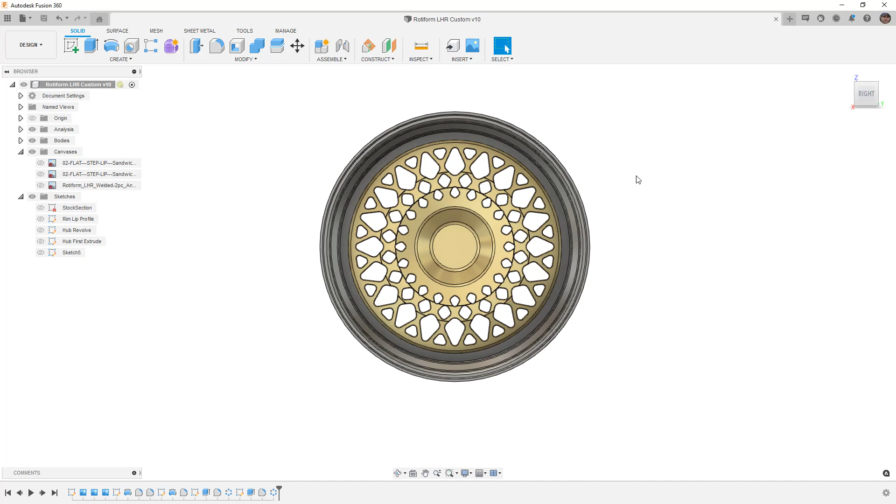Now remember when we first looked at the Rotiform rims, there were a lot of different configuration options. We can have a center cap which hides all the lugs, and those can be used for those sort of aero covers. We can also configure a lot of different things about the way this looks.

We are going to model it as it is inside of the image that we're using. We're going to have these little details, and we're going to take care of the details for the lugs. We want to make sure that we replicate these, and that's partially because these are challenging, and I want to make sure that we at least explore them.

So the first thing I want to notice is that this feature appears to contain the underlying shape that it's cutting away. So that flat face or that conical face is carried into this. We can see the reflections and the way that it looks. This tells me it's an offset cut. I want to explore how we can do that in Fusion 360.

Then we're going to move on to these little dimples and also the lugs here.

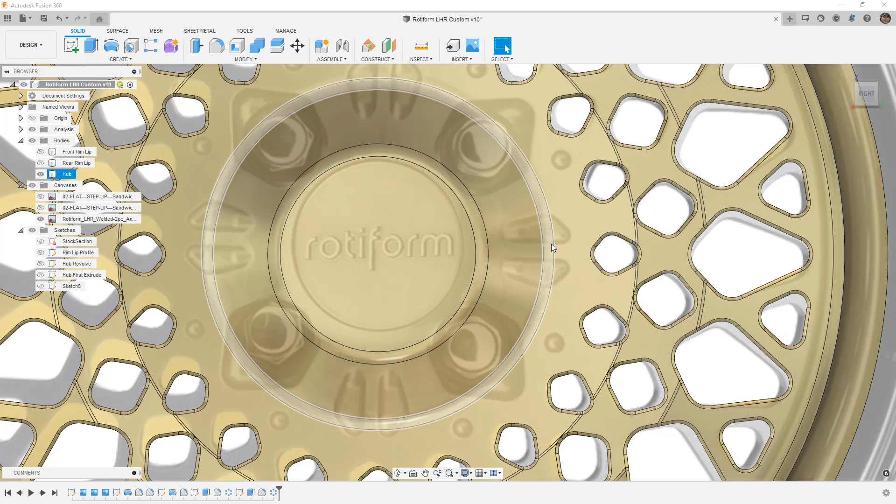So let's bring back our hub solid body. If you're following along, go ahead and continue to use your design. If you had any trouble, you can download this design from the description in the video. We want to work horizontally again, and we're going to just carry on because that's how we modeled all this other stuff. We want to try to make this design, which will then be mirrored and patterned.

So let's start a new sketch. Remember, we can hold down the left mouse button to select the YZ plane, as long as it's under our cursor. Again, I'm going to start with a line, a horizontal construction line, and I'm just going to bring it out here, hit escape, and then turn that to construction. So this is going to give me sort of a reference point.

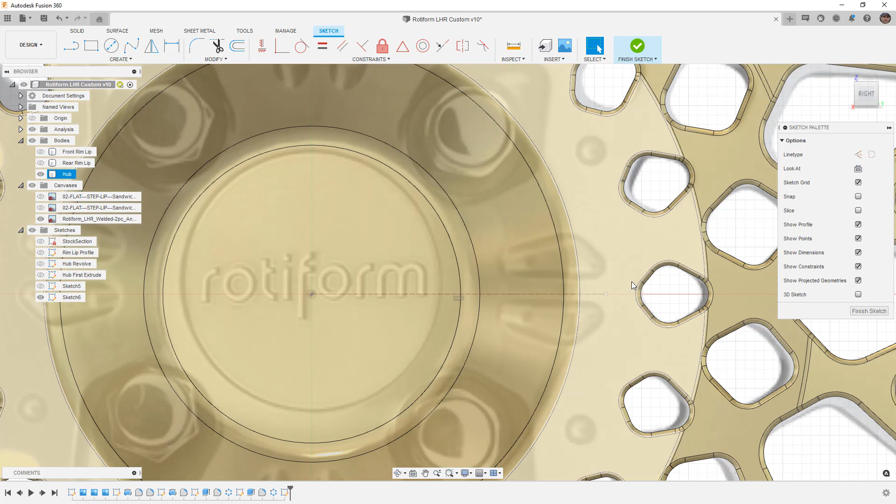Now remember, we are going to just model one side of this, and we need to be aware of where these are falling in the design. So I'm going to use P on the keyboard and project just this point. Then I'm going to use P again and project another point. If I'm looking at this straight line, it looks like it intersects here, and if I carry this line out, it almost looks to me as if it's going to intersect here. So visually, those are two points that I want to use.

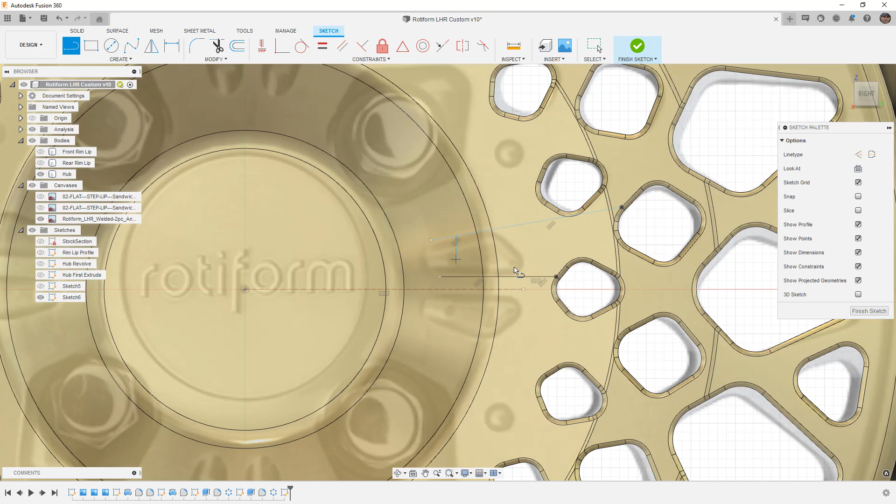Again, using a line, I'm going to carry a line down to here, and then carry it over, say okay. I'm going to carry a line from here, carry it over and say okay. These lines are going to be construction at this point, and these ones will actually be used for the design.

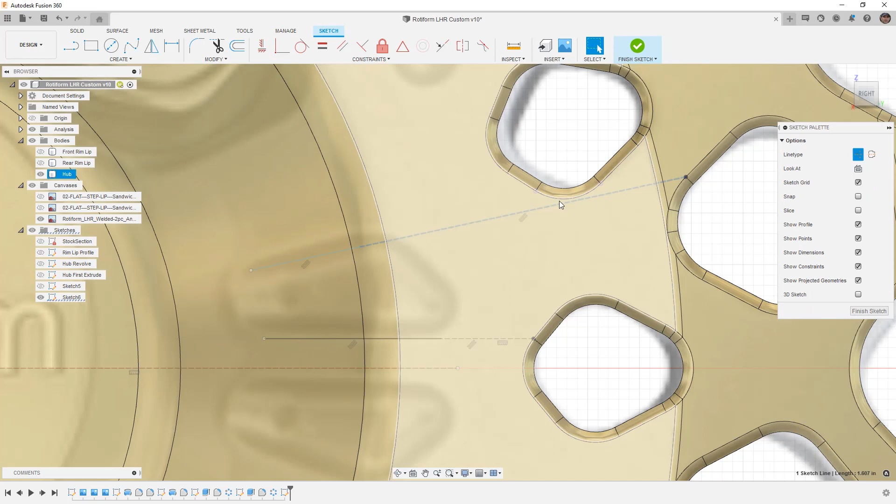Now notice that it's not fixing an angle here, and that's intentional because we're only projecting a point. If we were going to carry it from some other detail, we would need another point of reference. For example, if we use P on the keyboard and turn this into construction, we can say that these two are tangent potentially, or that they intersect. In this case, I'm not going to worry about it, but just note that if we were trying to drive this off of something else, we would need some additional references.

I'm going to continue using lines to drive the shape, and that's simply because I think the rest of these are lines, and then this is a large arc back here.

So now we're going to go to create arc, 3-point arc. We'll go between these two, from here to here, and from here to here. I'm going to try to add tangency to everything, make sure that this arc is tangent, and then this last one here. That looks pretty good, I'm pretty happy with that. I don't really care so much about the dimensions, but let's go ahead and add a few.

I'm just going to select things and add whatever dimension is coming up. And just to help me fully define this, I'm going to right click and make that an aligned dimension. I'm going to give this arc a value. And we also need to figure out some positions, right? So this in relation to the origin, for example, and that'll fully define us.

So the next thing that I want to do is hide this LHR wheel. I'm going to try two different things. The first thing I want to try is extrude. Now the way that extrude works is going to be a little bit tricky, but note that under start, we can offset and we can also start from an object.

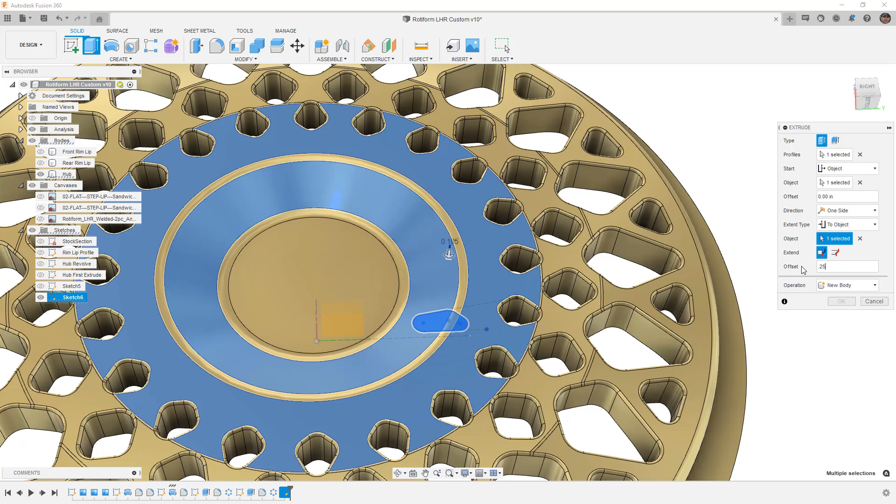Now, there is a difference between starting from an object and ending at an object. When I do this distance to object, what I want to do is select this face right here, and I'm going to give it an offset value. I'm going to say 0.25. Let's try minus 0.25. And you can see that this isn't working.

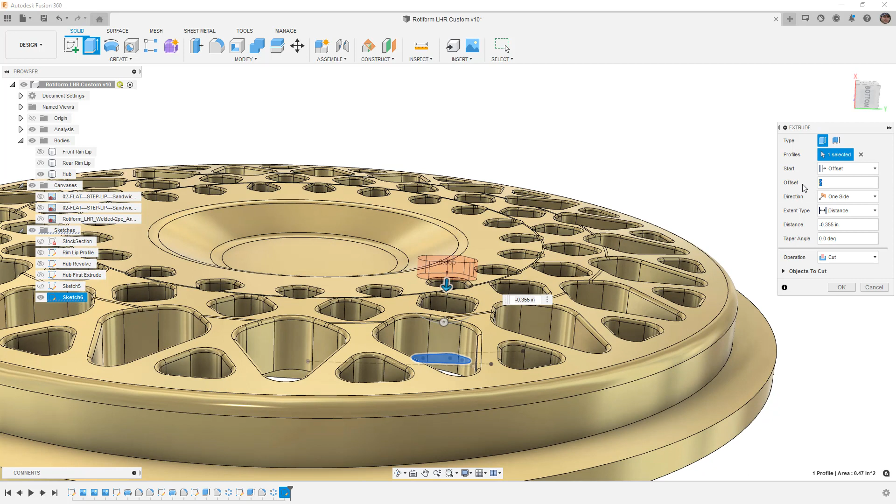So let's reset this. Instead of object, let's do offset. I'm going to say offset, let's say minus 2 inches and see where that puts us. So it's going down. So let's say positive 2 inches. That puts us in the middle of the rim. So I'm going to say 3 inches. That puts us above the rim.

Okay, then next I'm going to say to object. I'm going to select this entire object as the body. And then you can see it's got this minus 0.25. So now what we're doing is we're cutting into it. We're offsetting from the shape of the rim, and that's giving us the final cut that we're looking for.

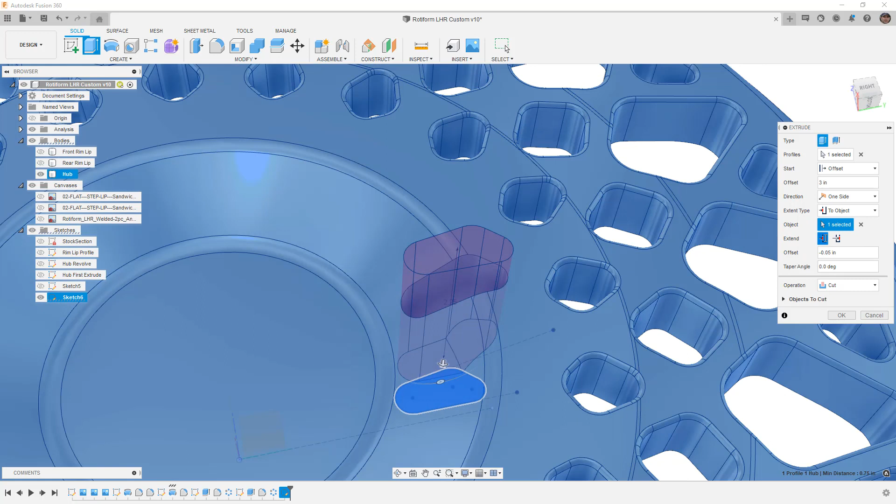When I say minus 0.125, you can see that offset for some reason goes quite a bit deeper. I don't really know why that is. It shouldn't really be going that far, but let's try a smaller value. The reason this can get a little tricky is because sometimes it wants to go through the entire body, so you have to be careful about how much we're taking away. That looks pretty good. I might increase it a little bit. Let's maybe take it to 0.1.

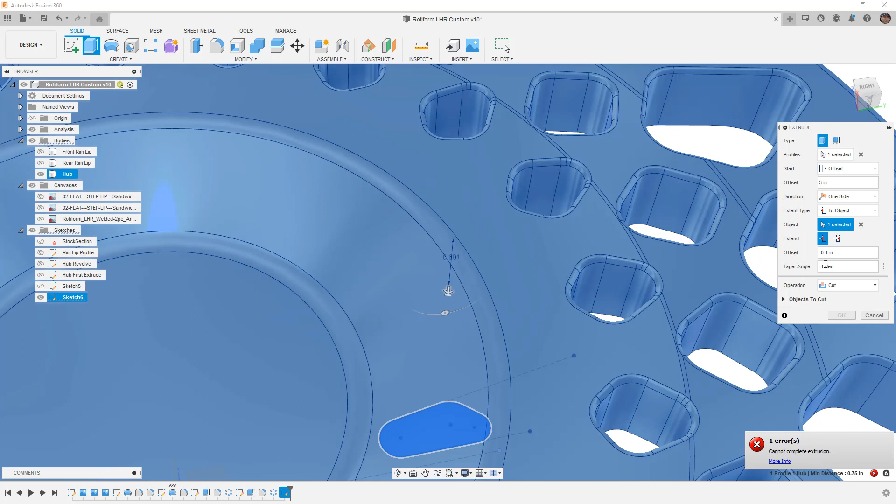And if we want, we can try to add a taper angle, let's say 5 degrees. You can see that completely does away with it. 1 degree doesn't work. Let's try minus 1. You can see that it's not really liking a taper angle, so let's leave it at 0.

Let's say okay. So now that we've cut that out, let's try to add a fillet to this bottom edge. Now remember, we cut down 0.1. If we go all the way to 0.1, you can see that it fails. If we try half of that, 0.05, we get that sort of rounded shape. I'm going to hold Control, or Command if you're on a Mac, and add it to the upper edge as well. So that gets us pretty close to the shape we're looking for. It's not perfect, but it does get us pretty close.

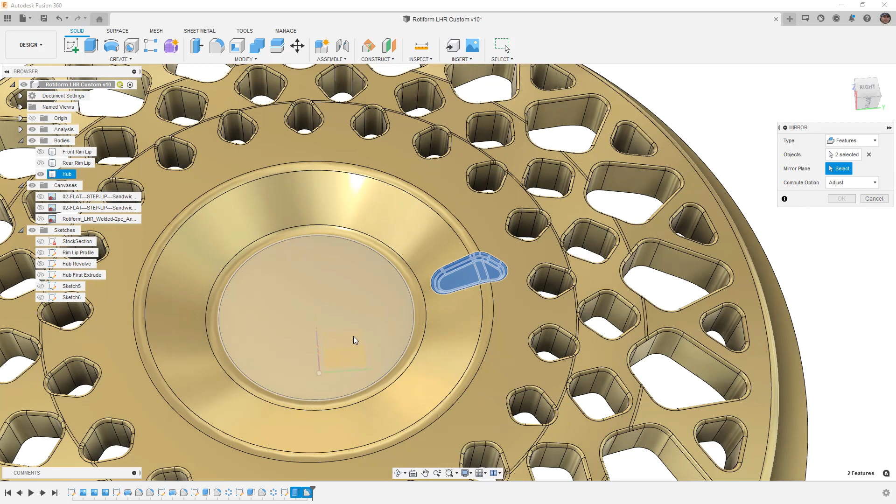So now that we have that, we're going to go to Create and Mirror. We want to select Features. We're going to try Features first. If Features doesn't ever work, you can always try to use Faces, it's usually a little bit more robust. And then for the mirror plane, I'm going to hold down the left mouse button over these planes, and I want to select my XY plane.

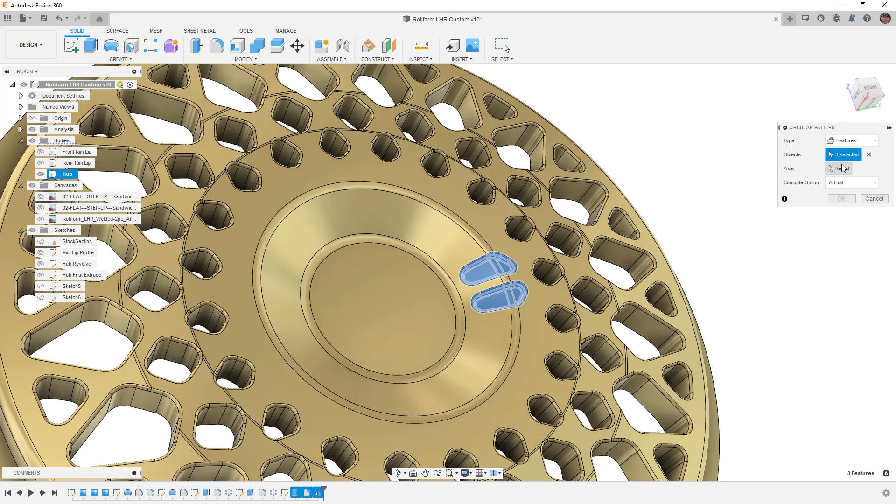So now that I have that on both sides, I can go to Create, Pattern, and Circular Pattern. I'm going to select Features, which will be the original extrude, the fillets, and the mirror. The axis of revolution, again, I'm going to select a cylindrical edge on my part, and this time it's only going to be 4. Now remember, on the picture, if we bring that back, we've only got 4 of those things, and again, this is going to be a 4-lug design, 4 lugs. We're going to say okay, allow it to adjust and see what it looks like.

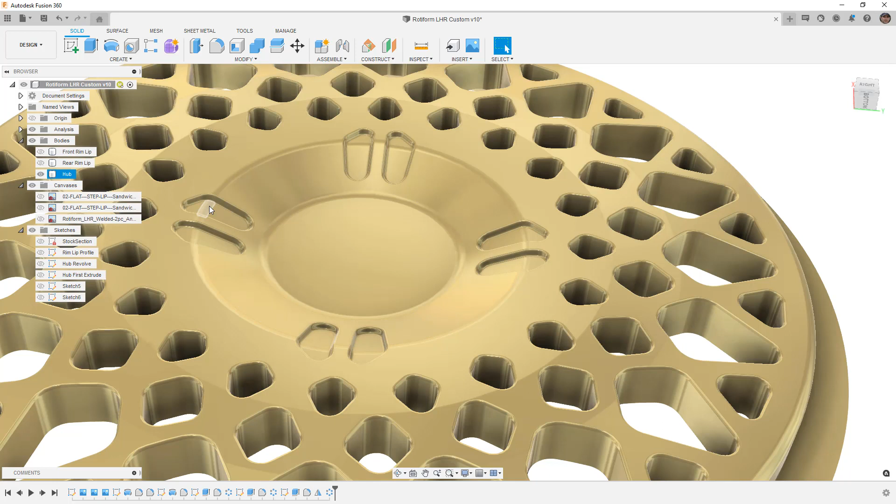So that looks pretty good. I'm pretty happy with those results. If we use Control or Command 4 to turn off the edges, that's what I would expect to see. You can see the shading and the shadowing, the lighting effects carrying on because we just recessed what was there. So that end result looks pretty good. There's a few more things that we have to add.

We have to add the dimples. We have to add the text in the center, which in reality is a separate center cap, but all I'm going to do, because this is really just for visual reference, is cut that away from what we have here.

Unfortunately, that is not a text that we're probably going to find. We're going to have to sketch that. We could also use a decal. I mean, it is possible for us to just apply a decal over it, so that might be a good option as well.

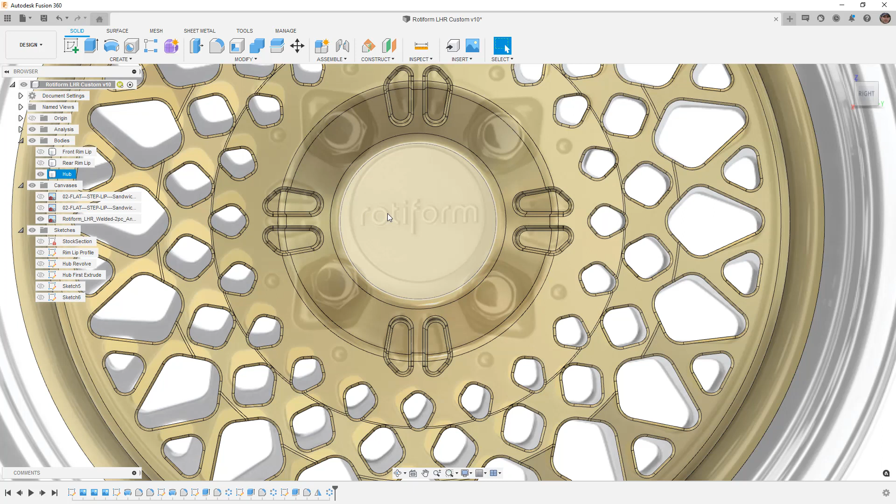But next, we're going to try to take care of the dimple, and we want to take care of the lugs themselves. When we're looking at this process, we have to think about the size of the lugs, and whether we're going to add the detail of the lugs being their own body or just part of this design. In this case, I'm going to draw the lugs separately, and I want to try to capture that detail. We don't really have all of the detail, but I want to start from the back side for the lugs.

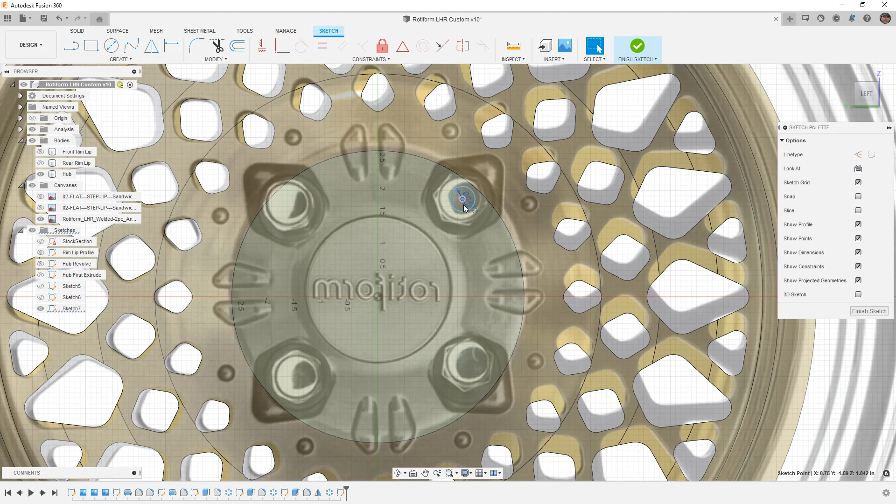So I'm going to create a sketch, bring back this, and start with a circle. In my design, it's a 12 millimeter lug that goes through here. Then we need to be mindful of the size of the pattern. So C on the keyboard for circle. I'm going to snap to the center of that, turn the circle into construction, and give it a diameter value.

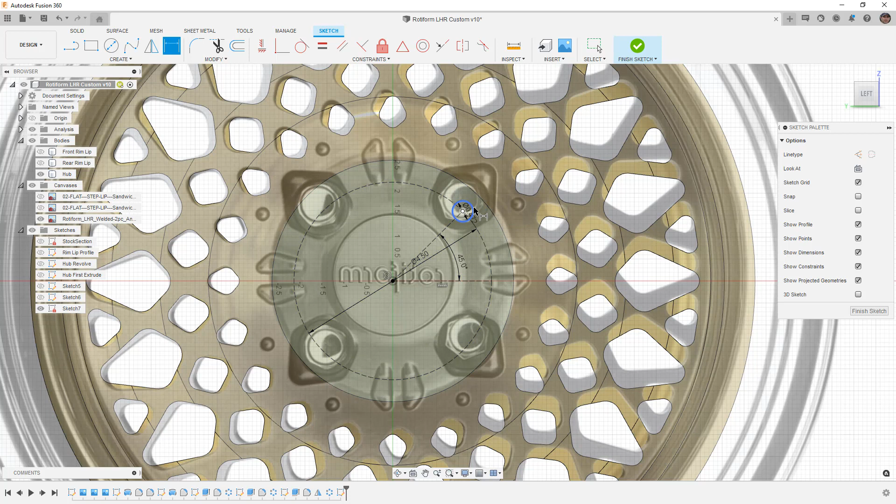Remember, mine was 4 by 114.3 millimeters, and that's going to give us the center of the lug, 114.3. Then we need to figure out this angle. So again, L on the keyboard. I'm going to make some reference lines, turn them into construction with X on the keyboard, and then dimension the angle between them. In my case, it's going to be 45 degrees. You can see it doesn't perfectly line up with the image that we have, which is why we want to do this part first.

So we're going to finish the sketch and extrude that. We're going to go all the way through, so the distance will be through all. Again, objects to cut, make sure it's just the hub, and we'll say OK. We could sketch all of that at once, but we're going to be patterning it, so I'm really only focused on one for right now. Now that we have an accurate location for the lug itself, we can get a better location of where the dimples are and the rest of these features.

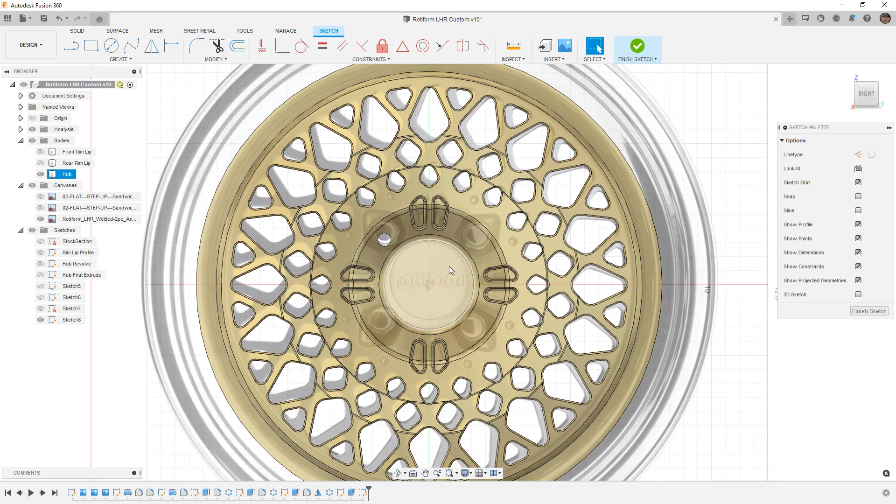So let's create a new sketch. Hold down the left mouse button, make sure that we're using a plane. We don't want to accidentally sketch on part of the body unless there's a good reason for it. Now I'm going to go back to the sketch and use P on the keyboard to project that point. Hide that sketch. Notice that I haven't been naming the last couple. We certainly should go back and name them, but at this point, let's just speed through the rest of the design.

So I'm going to use C on the keyboard, because the bottom of this looks like a circular reference. I want to pick some value that seems like it would be right. I'm going to do 1.25 inches. Then I'm going to use L on the keyboard for the line tool, which is going to come out, then come up, then come back down, and come back over to this.

Now, when we're doing this, there's a couple things that we need to keep in mind. We're not going to be able to match the image, because it's twisted or rotated just a little bit based on our sketch. We're using all of our coordinate systems, but the image has perspective. It was taken by a camera. It's not a true orthographic picture, so we're going to have to make some adjustments here.

But there are a few things that we do know. We do know that this is going to intersect directly with the center. Right now, in this case, it's actually got the perpendicular constraint applied, so I'm going to delete that, because I don't think there's a 90-degree angle there.

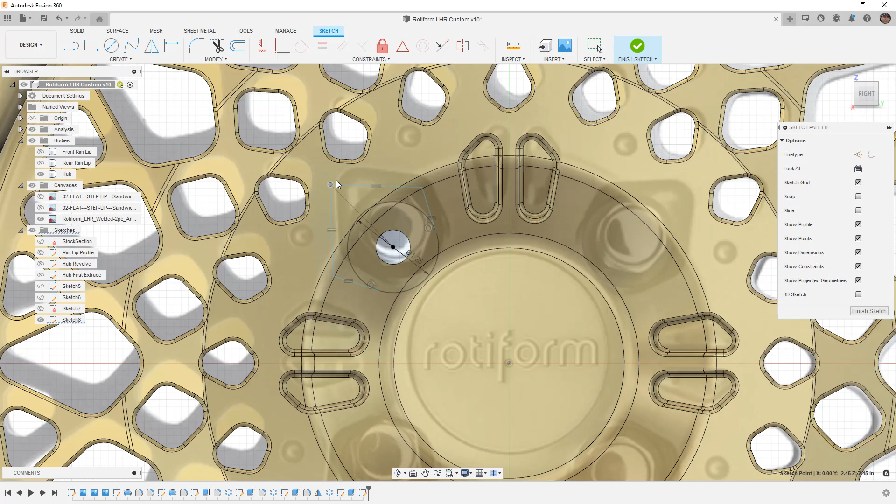Now when I make all those things equal and tangent, and I begin moving this around, you can see that as soon as it starts to hit this edge, it starts to hit this edge. And you'll notice that they're almost automatically parallel or pretty close to it. So I'm going to try to use these relationships. I'm going to use P on the keyboard, bring both of these in just in case, and then make these construction, hitting X on the keyboard.

And then I want to use a parallel constraint between these two. I shouldn't need to over here because they're equal, but I'm going to go ahead and do that. And then over here, this looks somewhat parallel to this edge. So P on the keyboard, I'm going to bring that over, select it, make it construction, and then again, parallel. I'm going to make this and this parallel.

Now you'll notice in this case, it's not actually allowing me to do it. Sometimes that will happen. Sometimes it's because of the geometry, sometimes it's because of some other relationship. But if it doesn't allow you to project it, likely it's because it's no longer a line. This was pretty straightforward, but this is going on a sloped face. So it's no longer a straight line when it's projected, it's some sort of polyline. And we can tell because the curvature combs display has been shown. When we select a line, we don't get that.

So it's not going to let me do that, but that's okay. We can still get pretty close. So I'm going to just visually get it kind of close, maybe pull this down a little bit, and then I can start to dimension some of this to get relatively close. That looks okay. I'm going to give this a dimension. I'm going to do aligned. You can't see it because of the dark image, but we'll do that.

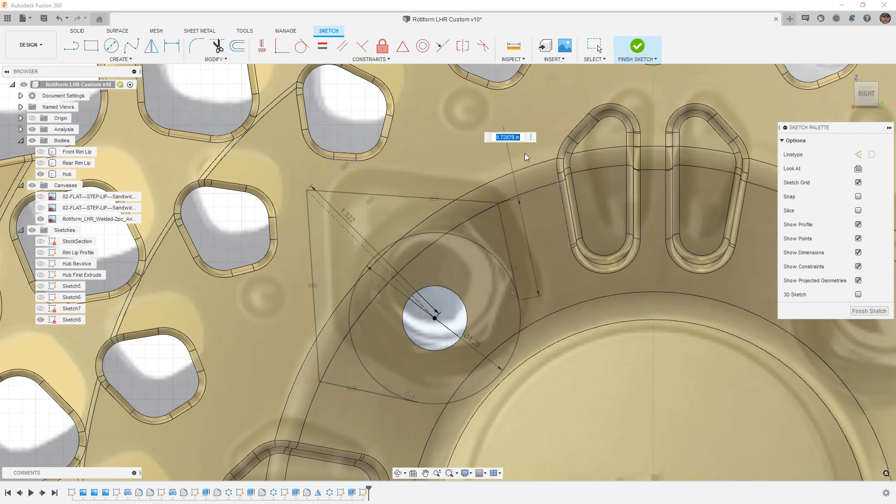All right, at this point, we do need to add some fillets in here. So I'm going to go to my fillet tool. I'm going to add a fillet between these two lines, one between these two and between these two. Now this is going to really break things. And that's because we had a lot of equal constraints. We had some relationships that we were trying to follow.

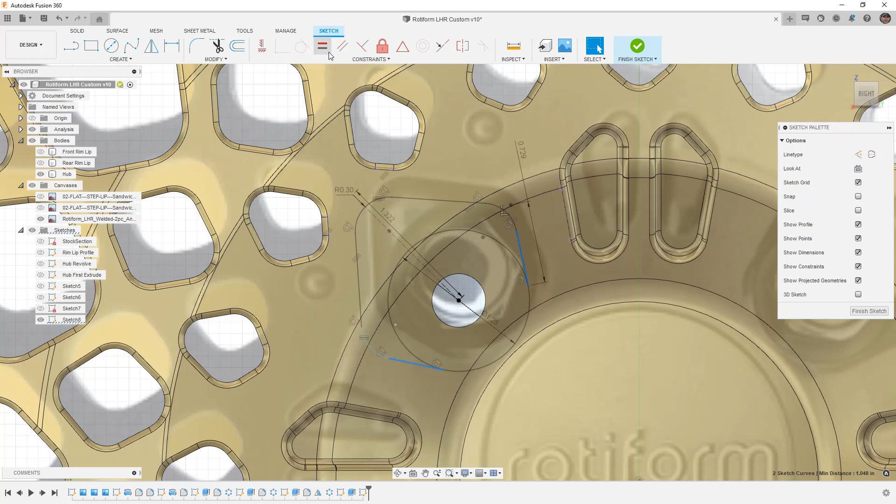But now we can go back and we can make this parallel, and that'll help that out. This one, you can see that this is sort of defined because of its dimension. So I'm going to take this line, and I'm going to make them equal. And that'll get me back to that fully dimensioned state.

So the next thing that we need to think about is what this actually looks like. And this is kind of a tough one because it's hard to see. But if we hide the body, you can kind of see there's a little flat section in here. It almost appears as if this geometry was offset similar to this, but then a cylinder, like this circle right here, was cut out of the center part of it.

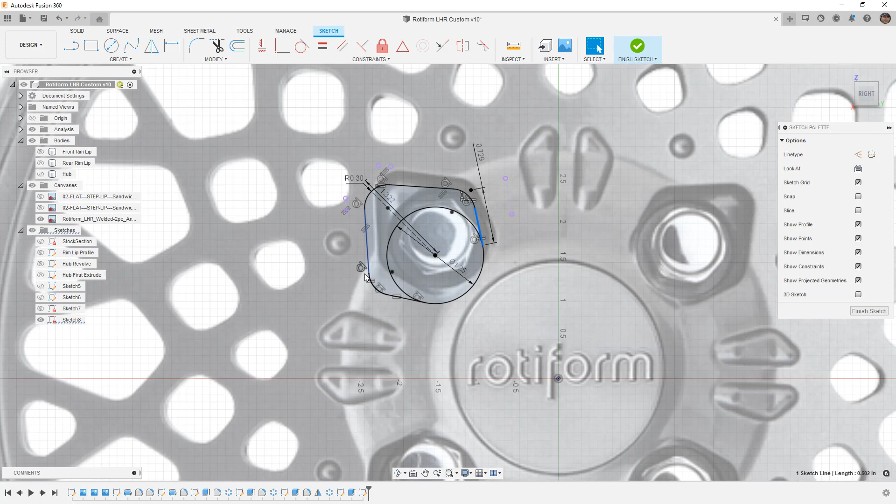So what I'm going to do is I'm going to take that outside profile. Remember that this is tangent here and this is tangent here, so we'll have that nice smooth interaction. But I'm going to take this entire profile and use that same method as I did before where I offset it. So let's bring the hub back. Let's use extrude. I want to bring this entire profile, the whole thing. I'm going to offset it.

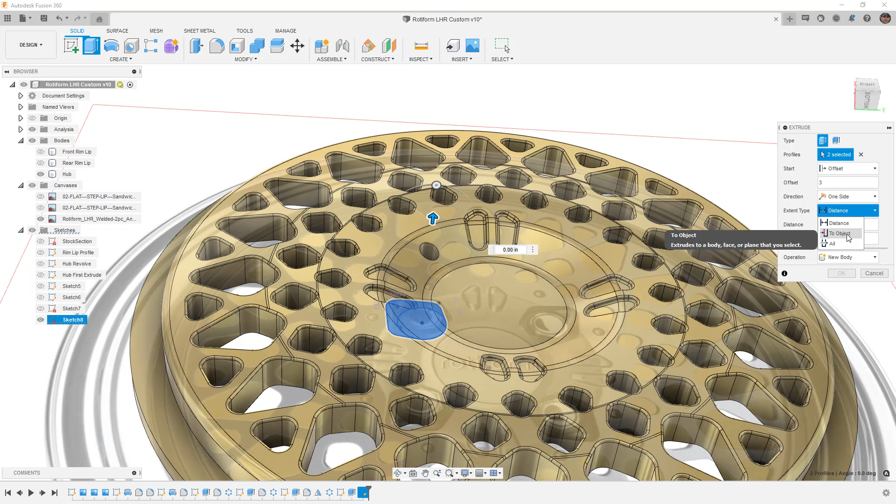Remember, we used 3 inches before, so that'll get me completely above. And then the distance is going to be to object. Remember, we don't want to select a single face. We want to try to get to a position where we're selecting the entire body. And then this time I'm going to offset it 0.125. Now you'll notice it's not really giving me anything.

So let's try minus 0.125. And you can see it's not giving me anything here. So let's try a little bit smaller. Let's try 0.1. When we view this from the right, we are able to actually see that this could work, but it's not actually giving us the cut that we needed. So instead of object, if we actually bring this down, you can see that we are able to cut into the solid body. So we do have a valid sketch.

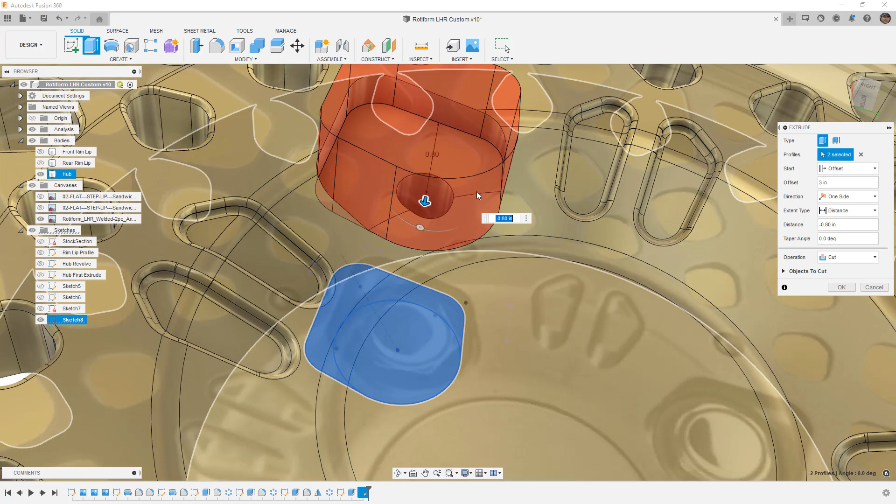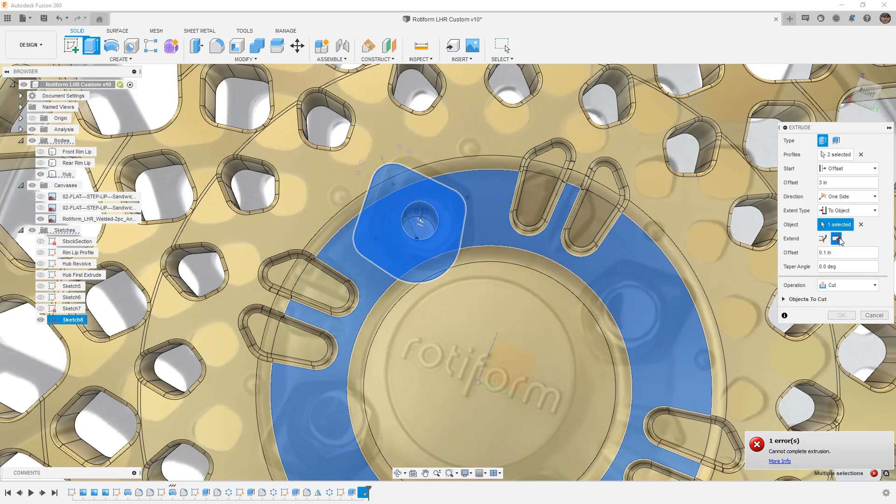So depending on how much time you want to spend making this as realistic as possible, it doesn't seem like this offset option is going to work because the to object reference isn't going to work. So what we could do is we could try to select a specific face, or we can use another technique. And the other technique is going to be to split the body or to split the face. So I'm going to try split face.

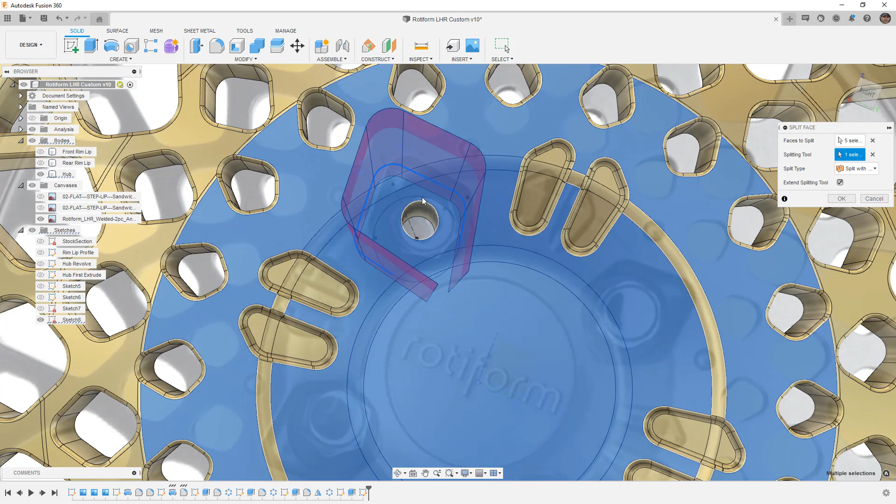Faces to split is going to be everything that our sketch overlaps. The tool is going to be this thing. But because I don't have tangency all the way through, it's not going to treat it as a valid sketch. So the way that we get around that is by going back to our sketch, and then we're going to use a modify tool called break. And we want to break this arc at the intersection on both sides. Then that arc is now in a couple pieces. So I'm going to hit X on the keyboard, turn those into construction.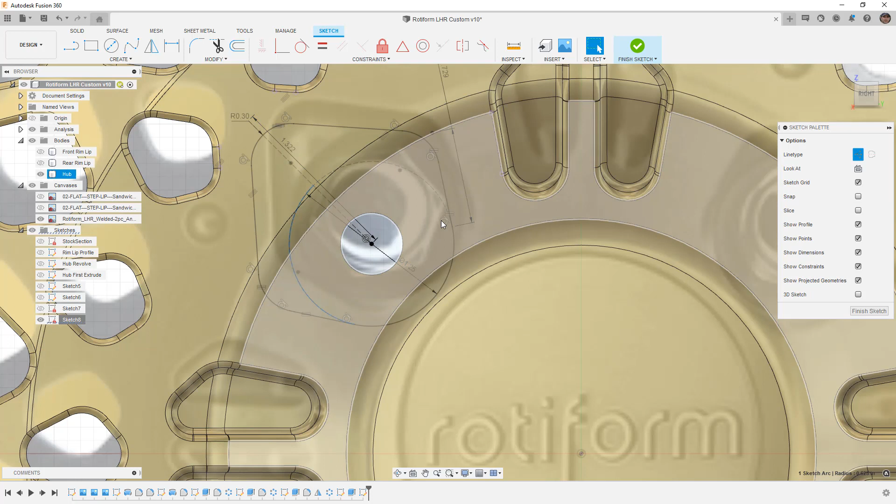And then now if we come to split face, faces to split, again, everything this thing intersects. And then our splitting tool will be that sketch, and we'll say OK. All right, so at this point, we've done quite a bit. We're not done yet, but let's go ahead and save. And that way, if anything happens, we can always go back.

Now, since we're using a slightly different technique, I'm going to actually go ahead and just show a little bit more complex version of this. So it's not something that we necessarily have to do, but I will say that the extrude likely didn't work because we've already cut this hole in it. So the simple solution would be just to do that extrude before we cut the hole.

Now, because we projected the center reference of the hole, we can't just simply go back and drag them before the other. So what I want to do is show you a little bit more advanced technique of building out the geometry that we need with surfaces, so that way you can see that technique and understand it. And the way that we're going to do that is we're first going to go to Surface, Create, Offset, make sure we turn off Chain Selection, and just pick the faces that we want.

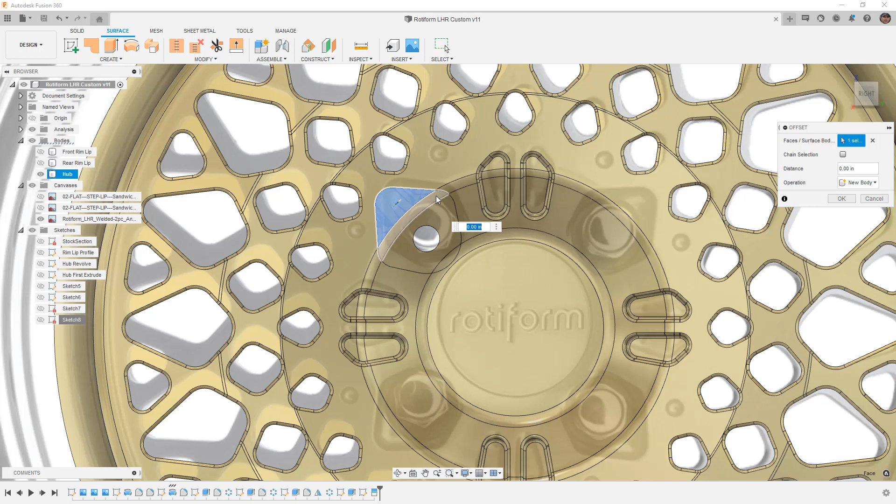So these are all the faces that we want to offset. And we could bring the center reference in if we wanted to. We don't necessarily need it. So I'm going to say OK. Then I'm going to hide the solid body. At this point, I'm just going to begin working on the surface body, but there is another reference that we do need actually. While I'm thinking about it, let's hide the canvas.

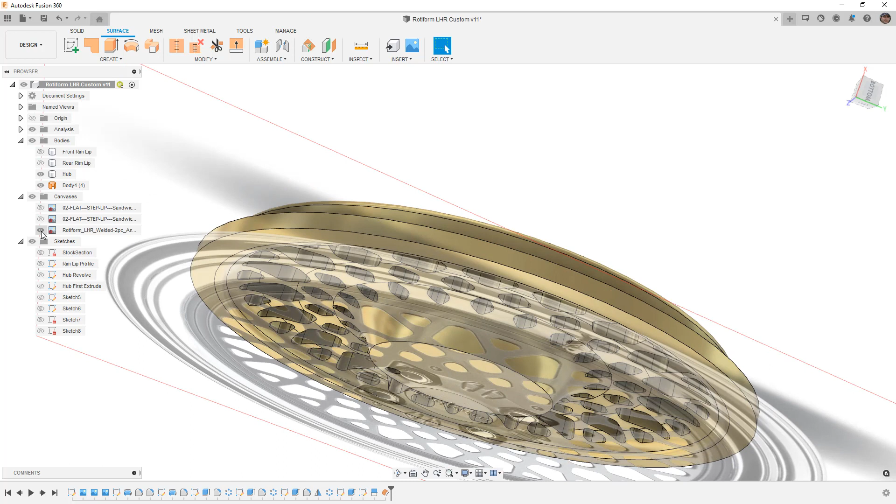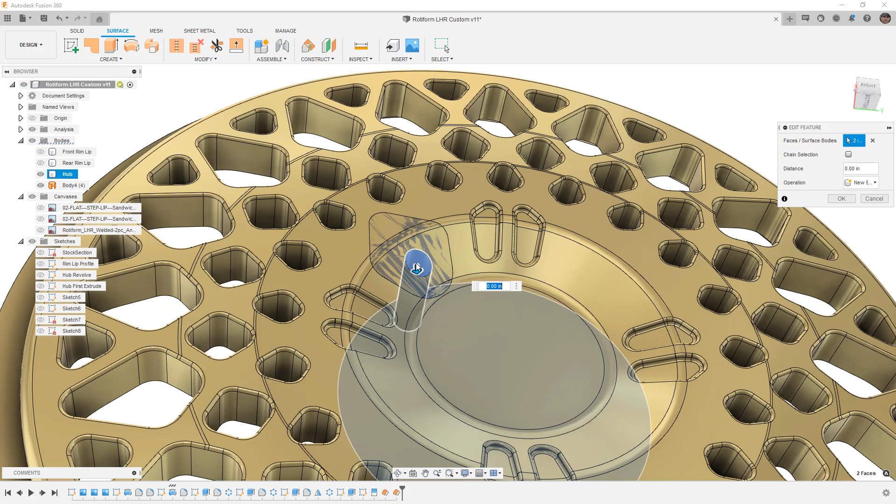Let's go to Create, Offset, grab the back, and we'll just make a 0 offset. Now the reason we did that is because now we know where the back face of that lug needs to go. And that's kind of important because that reference there is actually going to be used when we create it. So let's edit that second offset feature, and let's just grab the lug to go with it. So now we know what material we have, what we're working with.

So the next step in this process is let's bring back Sketch 8 and let's create an extruded surface. So we're going to use this. I'm going to offset it. Remember that before what we were doing was we were potentially offsetting from an object. It's not going to work the same way as it did there. So you can see that it's not allowing me to offset it.

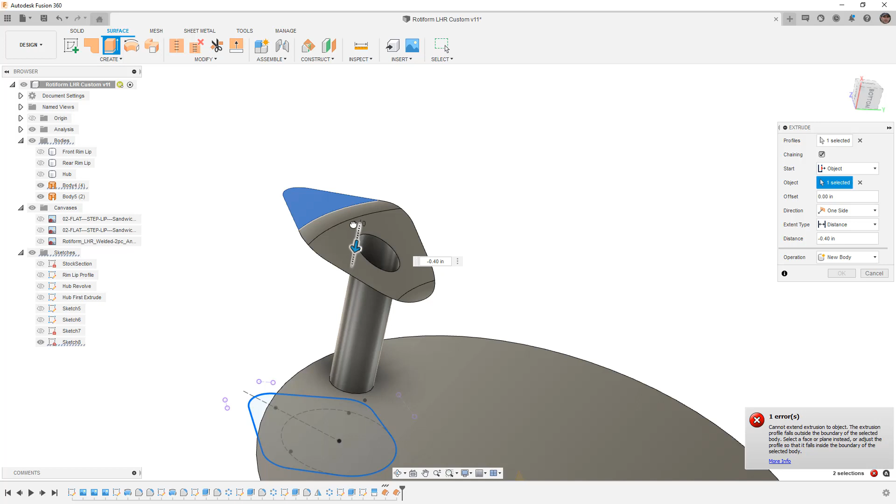So we're going to say okay for that extrude. We're going to hide it temporarily, and let's go ahead and try to make an offset surface of this right here. We're going to bring this down and just sort of offset it. You'll notice at some point it disappears because of that fillet, and you'll notice that it's not really giving me exactly what I want. It's offsetting it based on the normal direction of all these surfaces.

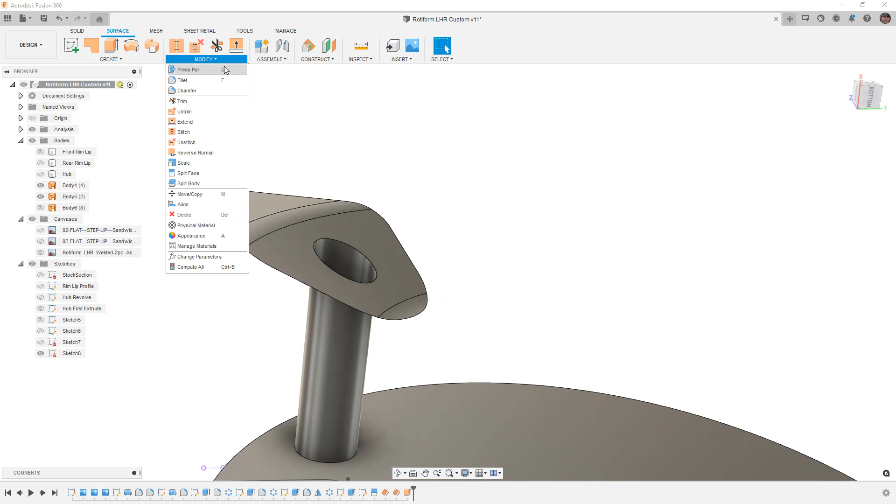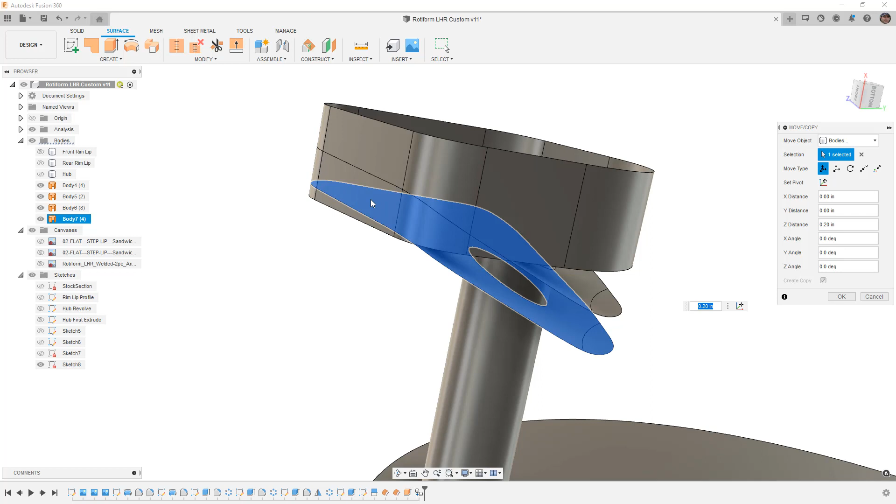So another trick that we can do is instead we can use Move Copy. We can copy this body. We're going to select Create Copy, and we're going to pull this straight down. And the reason that we're going to do this is because instead of that extrude on the side that we have, this piece right here, what we're doing now is we're representing that surface that we want, that sort of bottom face, and what we're building is the side wall of that surface. So we're going to say okay to that, and this top is going to completely go away. We don't need any of that.

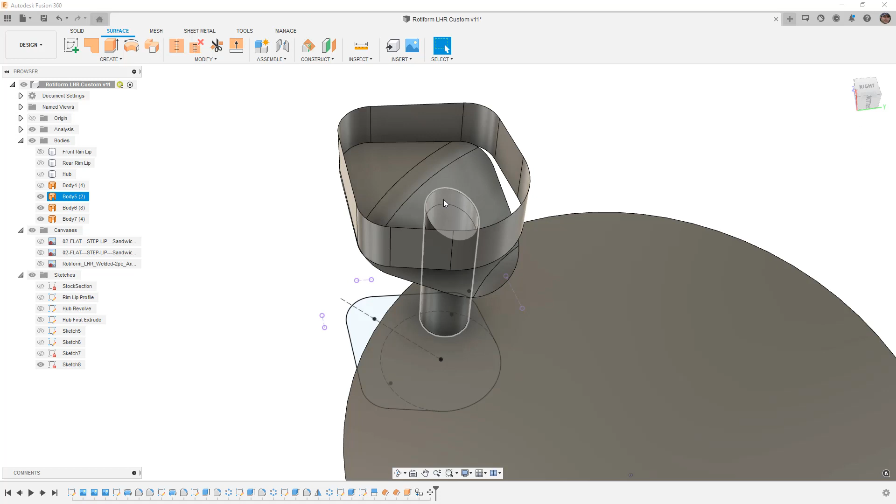What we actually need is going to be this lower surface, which remember, this is the body that we're cutting away from, right? So what we need is this lower surface, and then we need it to come down, but we need it to transition into a cylinder that's larger than that, and that ends at a face that's planar to the bottom surface. I know it's kind of out there. It's probably not a good idea to try to get too deep into this, but essentially what we're trying to do is we're trying to build all of the surfaces that we need.

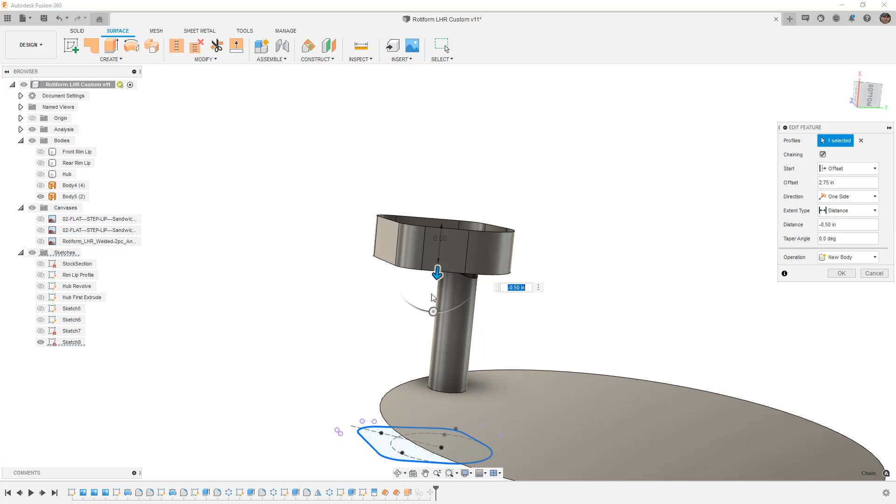Thinking about this, I'm going to go back to this extrude, and I'm going to just make it longer in case we need it. There's no harm in having it longer because we're going to begin trimming it away. And we can sort of use this as the bottom face for where the cylinder needs to go. So the next two things we're going to do is we're going to go to Patch. We'll select the bottom face, and it's going to create a planar patch. Then I'm going to take this cylinder. I'm going to create an offset. And what I'm doing is I'm making a larger cylinder that's big enough for the lug itself.

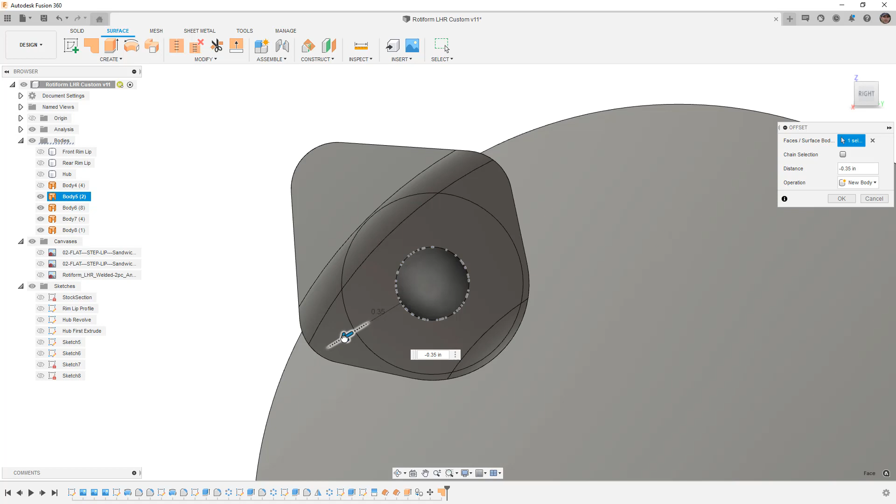Now, if you'll remember, originally what we did was we had like a 1.25 inch radius or diameter cylinder. What I'm going to do is I'm going to get it pretty close. You notice that 0.4 is too big, 0.3 is too small, so we're going to go minus 0.35. You can see that gets us pretty close. We could use exact values, but this is going to work for us.

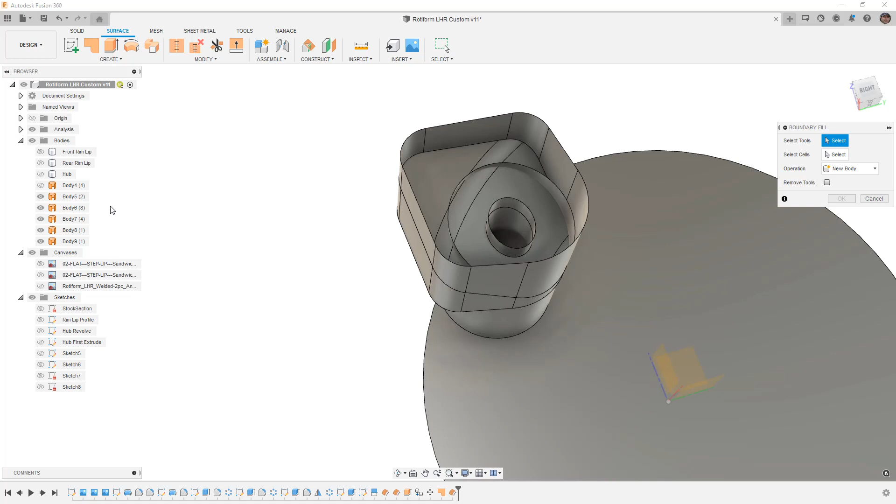Okay, so now there's a lot here, right? So we've got a bunch of different pieces to this. There are a couple ways that we can move forward from here. We can try to trim everything away as we need it, right? We don't need this top surface, but we can start to try to trim stuff away, or we can try to use a tool called boundary fill. We can select all the tools that we have, which is sort of the inside and outside surfaces, the upper surface, this extrude, our offset on the bottom, this flat face here. And then what we're left with is going to be cells that we want to keep.

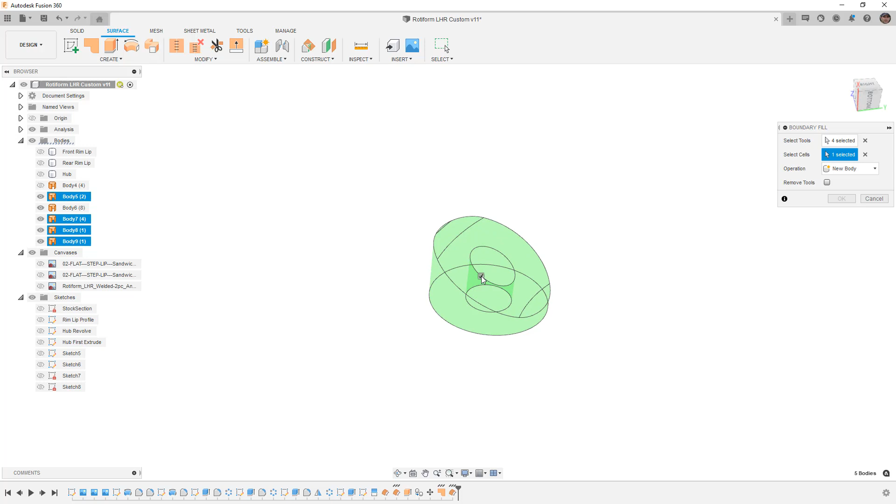Okay. Now this isn't perfect because we haven't completely explored this, but this boundary fill tool lets us sort of build out all those regions and figure out what's left behind. So I'm going to cancel that and I'm going to work with just my surfaces for a little bit. And the reason that we're going to do that is because in order for boundary fill to work, we need this top piece as well. So let's try boundary fill one more time, and then we can decide if we want to go back and use the other stuff.

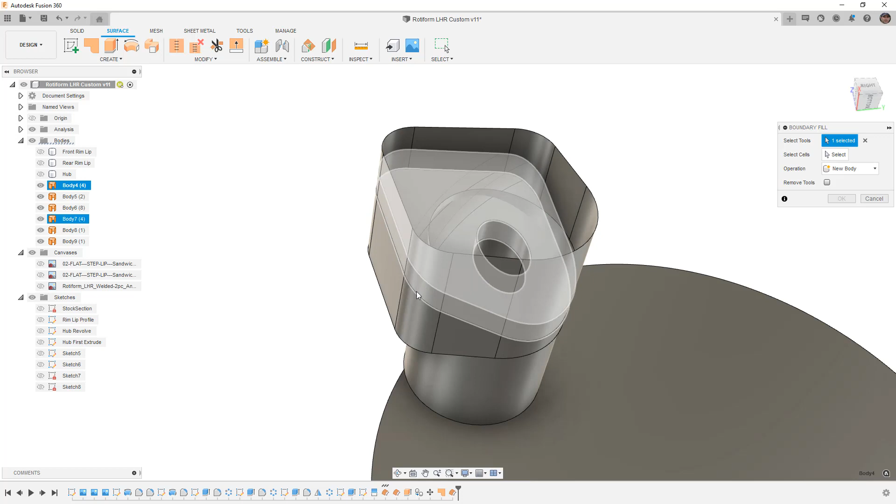So let's try selecting all of these surfaces. So the outside, we need this inside piece. So I'm going to hold down the left mouse button. If we're having trouble, we can also go into the browser and select things there. We need the offset from the cylinder. Now you can see that we've sort of got this solid body.

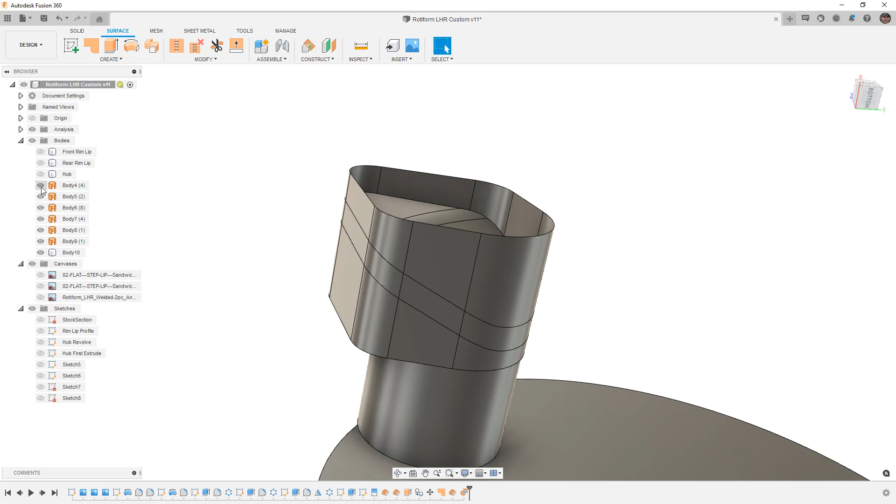We need to select this inside cylinder as well. So let's select body 5. And you can see what we're left with. All these green areas are things that we can select to either keep or remove. So if we want to keep this, for example, and this piece, we're going to be left with a solid body that represents all of the combination of those areas.

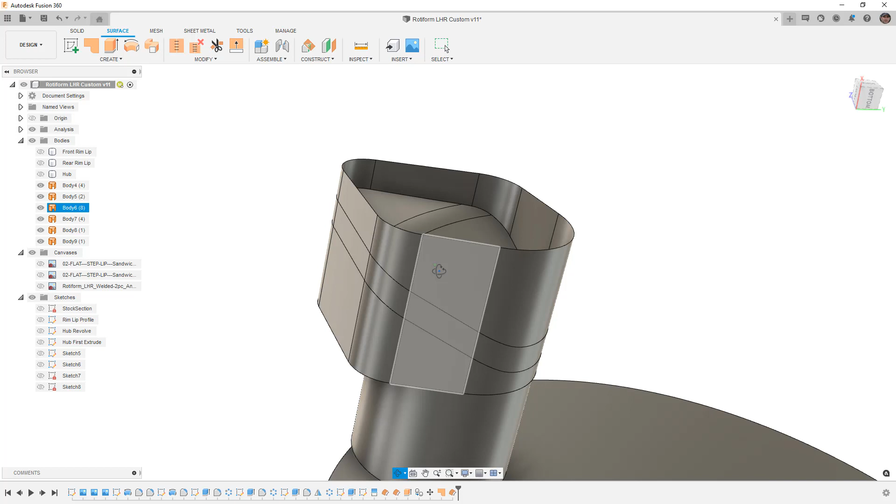Now, this solid body isn't perfect because remember, what we actually want to do is we want it to dip down a little bit. So this tool is kind of tricky to use because we have to go through the process of visualizing the entire thing as a culmination of all those bodies. If we're to do this with surfaces, what we need to start doing is using trim, and we're going to begin trimming away the stuff that we don't need.

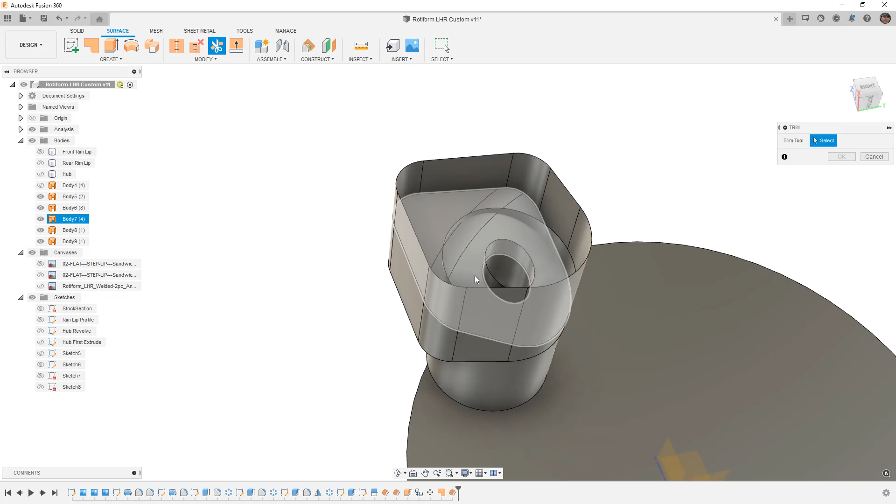So for example, this outside cylinder, we want to trim away at this bottom piece here, right? This outside cylinder needs to come all the way through this surface and it needs to end at the bottom here. So we're going to start by trimming with that and we're going to get rid of the bottom. Okay. So now we can kind of see that we want that large area. Remember, all the stuff underneath here is going to be solid. We want that large area to carry all the way up through to the inside of this face.

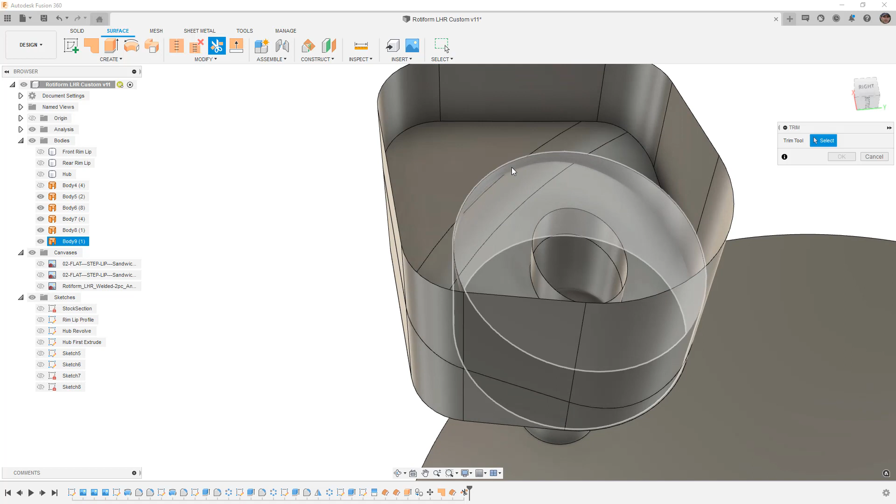So if we trim again, we're going to use this as a trim tool and we're going to get rid of the inside. Now, if this doesn't work, sometimes it's the angle of what we're doing and the way that we're selecting stuff. So let's try it first. Let's use this as a trim tool and see if we can get rid of the top. And then let's hide, let's see, body 5, body 6. Let's get rid of those for right now.

Let's try trim again. Now we want to use this as a trim tool and try to get rid of the inside. Now, sometimes when this doesn't work, it can become extremely frustrating, but we have another option that sometimes is easier, and that's split face. So the faces to split, we're going to grab all of these faces that we intersect, and the splitting tool is this cylinder. We're going to allow it to extend, and we'll say OK.

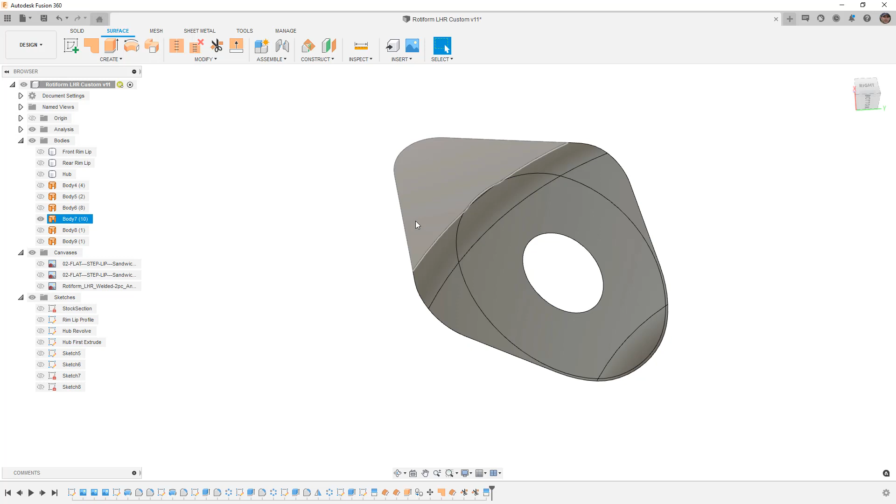Now, when we do that, what we're left with is this face here. Let's go ahead and hide everything else. This face where we can come in, select everything that we want to get rid of, and just hit delete. So sometimes using that as an option is a bit easier. The trim tool usually works. For example, we can get rid of that fairly easy. But sometimes when we have complex geometry, it just doesn't like it.

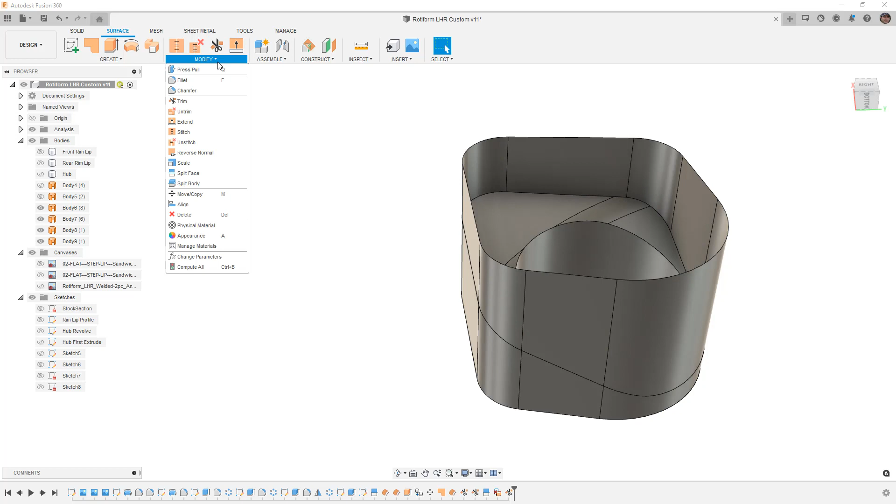All right. So the next thing we need to do is we need to get rid of this extruded surface below this face right here. So again, trim. Our trim tool is this, and the stuff we're going to remove is underneath here. And again, it doesn't like it. So sometimes if the intersection between those is exactly perfect, you actually have to go and use other tools or extend them. It really wants them to automatically extend through. I'm not really sure why.

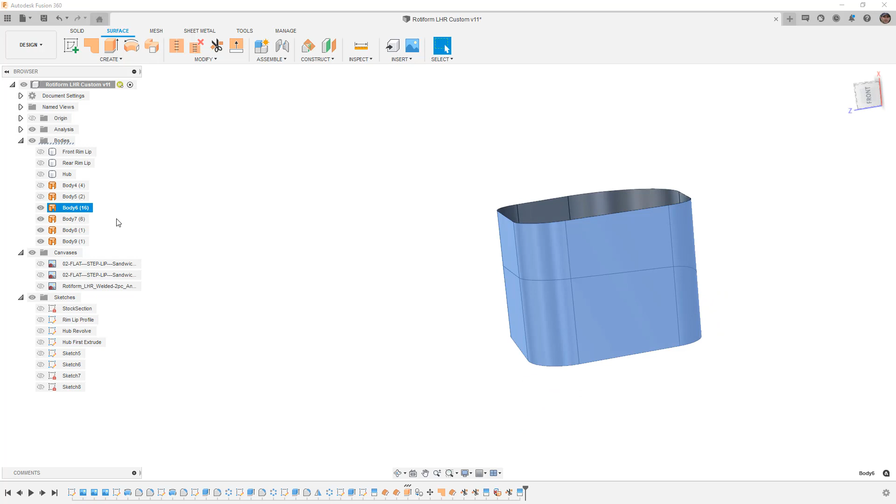The splitting tool, we want to select the entire body, not a single face, and we want to allow it to extend. Okay, so once again, this body right here, let's go ahead and just hide everything else. This body, we want to remove everything that's on the bottom. So we're going to drag from the bottom over. Notice it's selecting the whole thing. Let's just manually work our way around, selecting all these little bits.

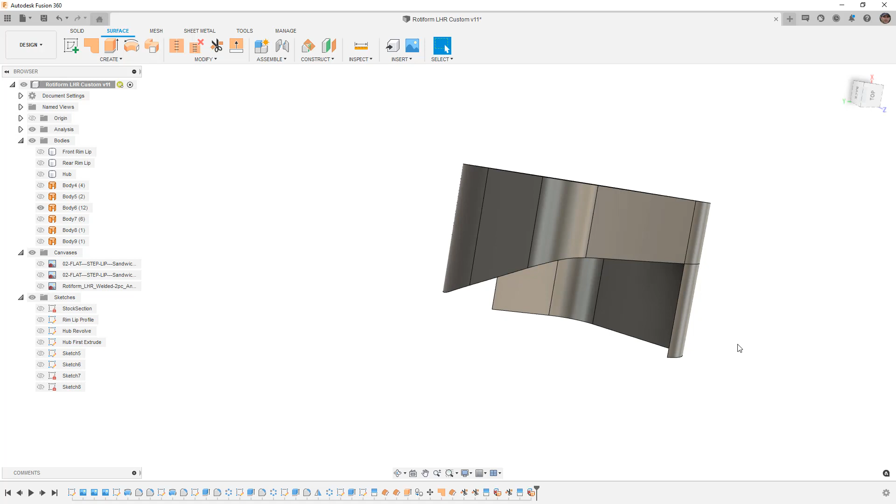We can do it a little bit at a time. We don't have to grab everything at once, but we want to use delete on the keyboard to get rid of them. So now let's start bringing some of these bodies back, see what we're left with.

So now I made a mistake and I got rid of the wrong section down here. This face right here really just needs to be on the inside. I can go back and figure out what I did wrong, or I can just continue moving forward.

So what I want to do is build a planar patch inside of the cylinder, and then I need to trim it. This is my trim tool, and I want to remove that little piece of the cylinder on the inside. Then I want to use that as my trim tool, and get rid of this top piece here. So now we're building out the rest of that lug.

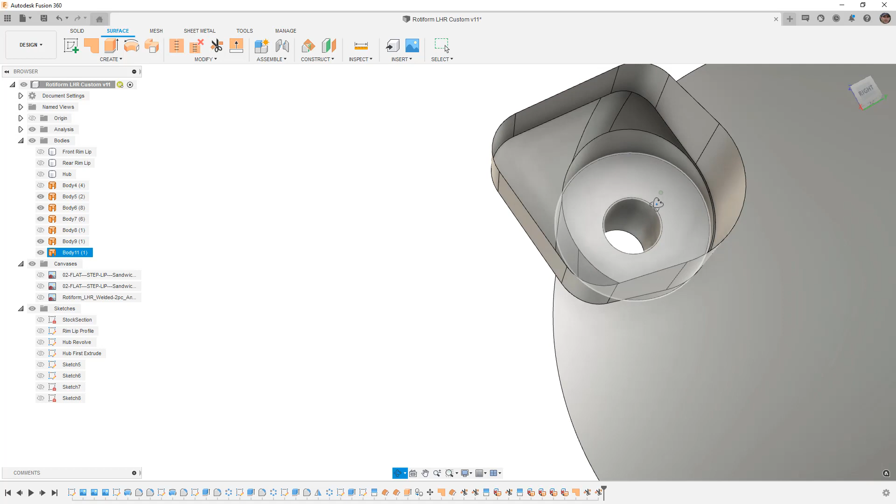Everything in here now is ready to be stitched together as one. So we're going to use the stitch tool, grab all these little pieces, and what we should see is a green edge between everything that connects. So this body here is all one piece now.

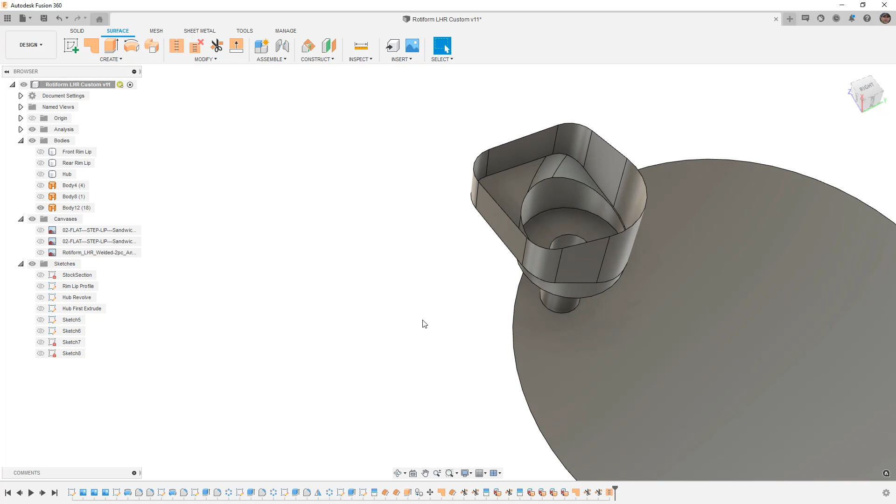Now the reason this is important - actually I don't need this whole piece, I'm just going to delete that. The reason this is important is now what we can do is we can stitch up the top of this. I'm just trying to see what other things we have that we don't need.

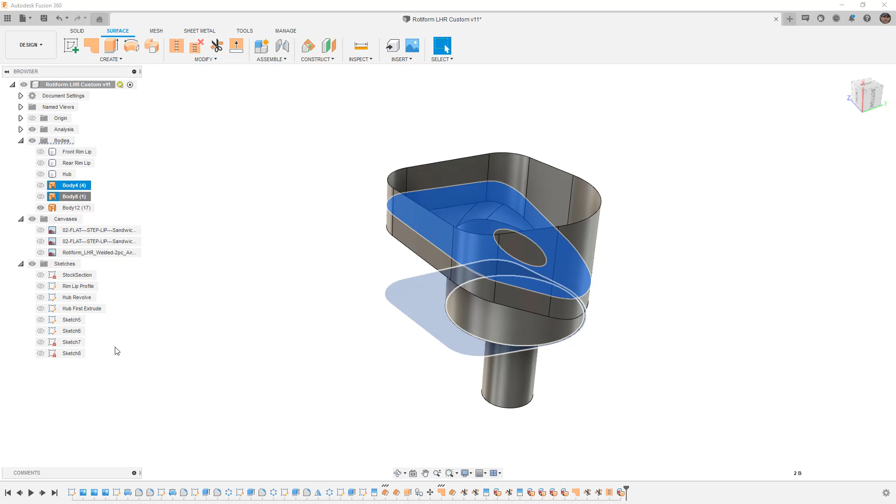So I want to get rid of that, and that. I'm going to right click and remove them. But now I'm going to patch the top of this, and patch the bottom. Because when I stitch all this together - the bottom, this entire thing, and this top - what we've done is we've created a solid body. So if I bring the hub back, that solid body can be used in a combine.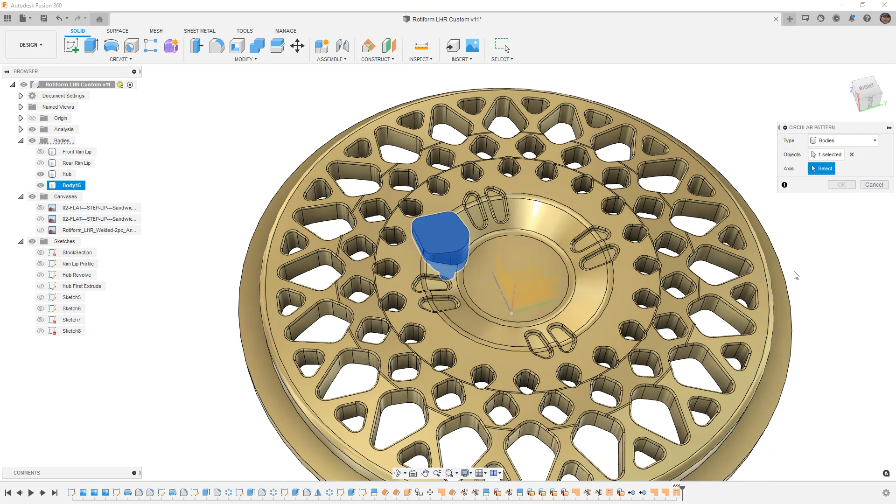So in my solid tools, we're going to pattern, create a circular pattern of that body around the cylindrical face, and then we're going to use combine. We're going to use the cut. The target body is the main rim, and the tool bodies are all these little pieces that we created. So now when we say okay, what we've done is we've removed that information.

Now we could have done this at once. We could have added fillets. We could have repeated that. We could have mirrored the face. There's a whole other different methodology that we could have done.

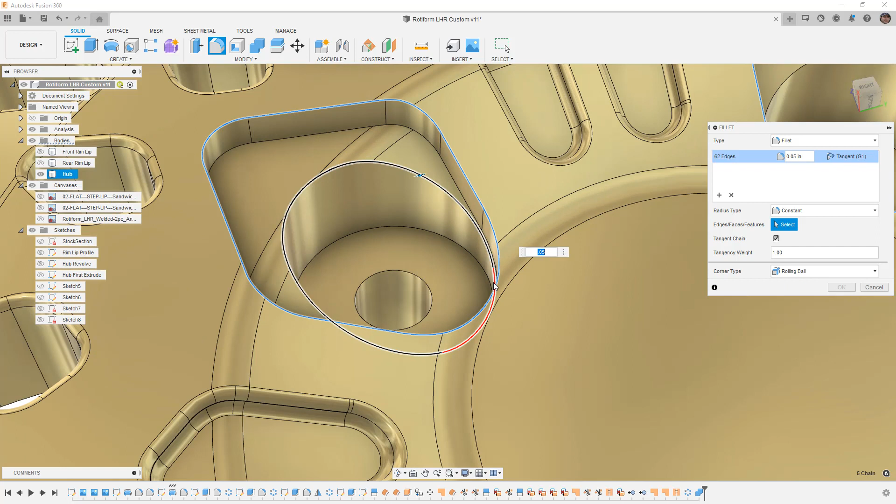But now we can come in and add fillets to these upper corners. I'm going to go ahead and grab all these edges - let's say 0.05, we just add a fillet to that. We can try to fillet this, but it's not going to like it because of its proximity here. And that comes back to making that cylinder the right size.

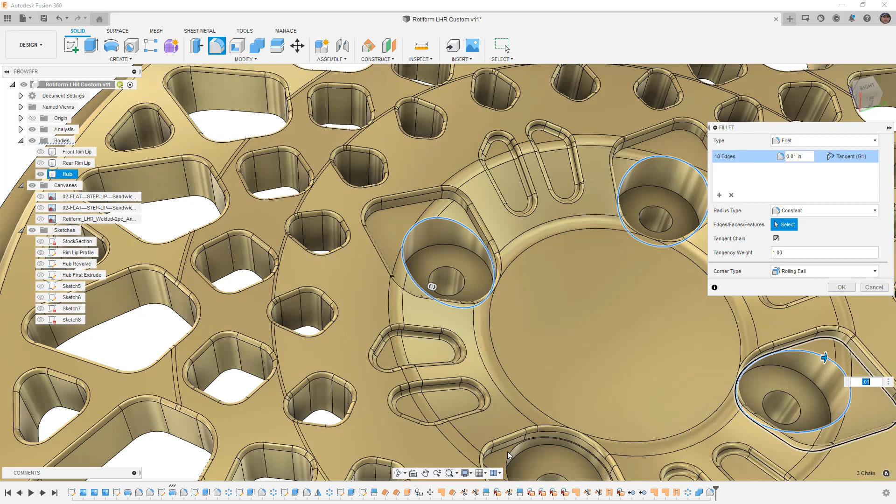Honestly, for the level of detail that I need, I don't really care about that. If I want to fillet it, I just need to pick something small enough to give me the level of detail I need. So again, holding down Control or Command if you want to select more edges. We'll say okay there. And then if I want to add one to the bottom, I'm going to go ahead and add one that's 0.01 down there again.

So now we have a lot more detail in that area. If I rotate this around and hide the edges, you can see that's starting to look a little bit more like the images. It's not perfect because I don't really have great references for what that looks like, but that surfacing trick sometimes is helpful to building out each piece of that complex process.

Now, you'll note that I ended up having to create a couple of extra surfaces. If I had been able to visualize that at the start, then boundary fill would have worked fine. Because sometimes it's hard with these complex shapes, or we're going to have like 10 surfaces combining to make some unique shape, because that's kind of difficult to do. Oftentimes, using that sort of stitch, trim, and patch method is probably a little bit easier to visualize.

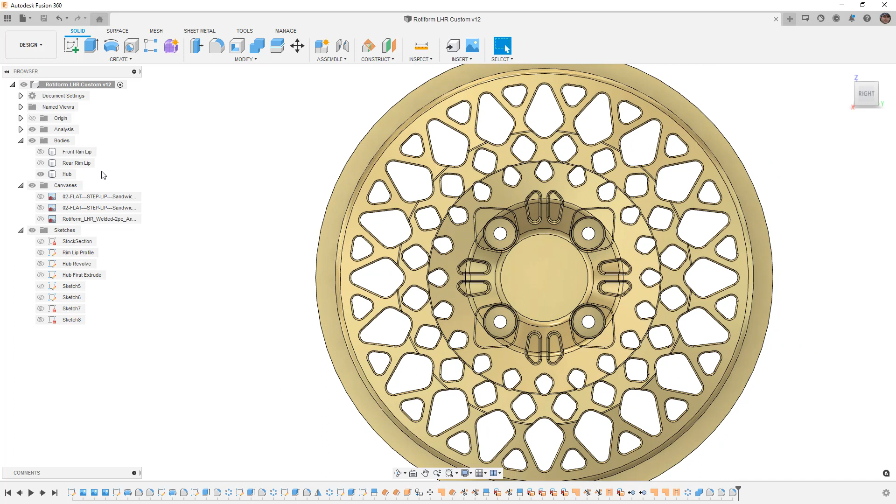So the last thing that this really needs, or the last two things, is going to be that little dimple and then the Rotiform logo in the center. I'm not really going to worry too much about the hardware, but we can draw some hardware and pattern it if we want. But I'm really just concerned about getting all these details to look right. So let's take care of this little dimple, and there's a couple ways that we can do this.

We can do this with just a cylindrical extrude and a full round fillet, or we can draw a revolve cut if we had a plane that went right through where we wanted it, or we could use the create primitive sphere. We could put it at the right spot and remove it. So because we haven't really used primitives before, let's go ahead and try this.

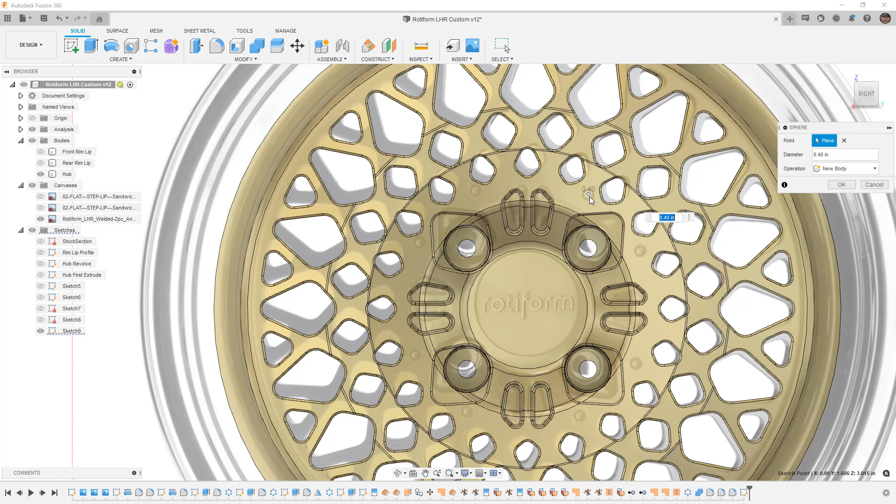We need to have a plane or a planar face to sketch on, and because that's not a plane, I need to select a plane or a planar face. I'm just going to use that. I'm going to draw it here. I don't know what the diameter needs to be. I can't really see it, but I know it needs to be smaller than that.

Let's try 0.25 and let's hide the solid body. So maybe a little bit bigger, 0.3. That's probably okay. Then what we need to do is move that thing into the right location.

I don't need to see the image, but I need to take that body and use move. This is where our analysis and our section view can come in handy because sometimes that can help us just see where this needs to be. That looks pretty good. I probably want to make sure it's forward a little bit more.

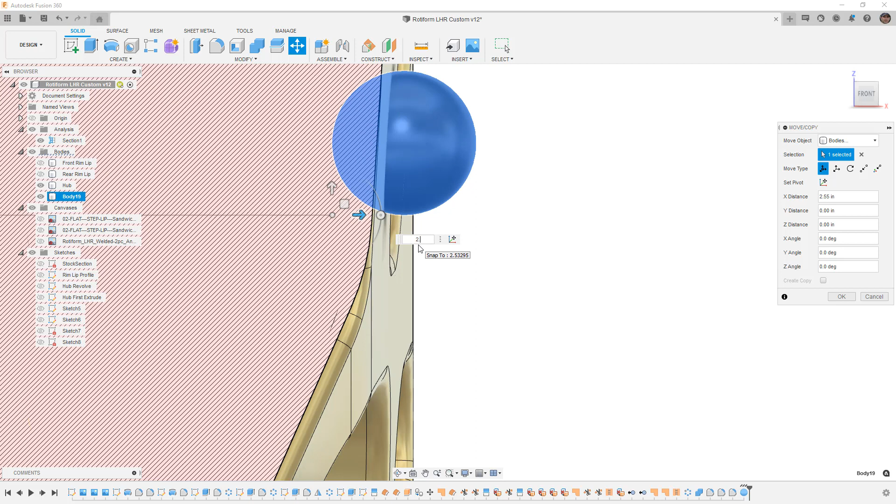So probably 2.55, and we'll say okay. So that is okay. However, part of the problem is I used the reference image for where that should be located, and I didn't really use any specific angular reference, right? So it's not actually in the right spot.

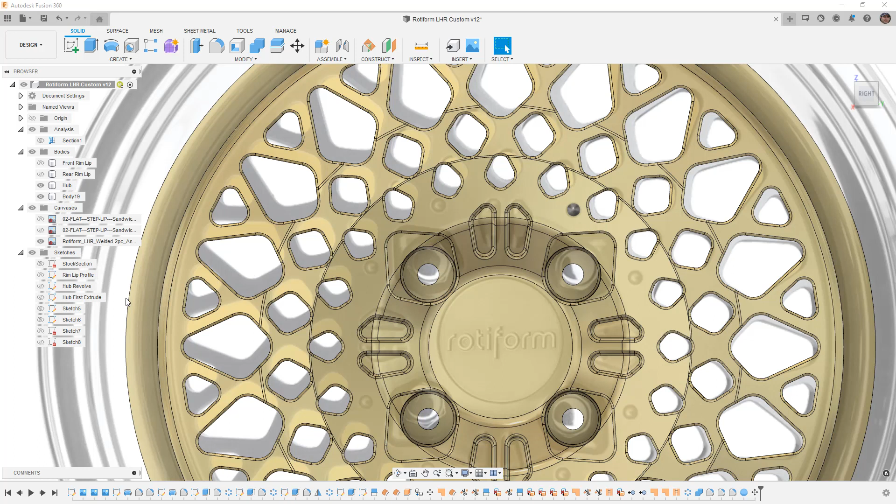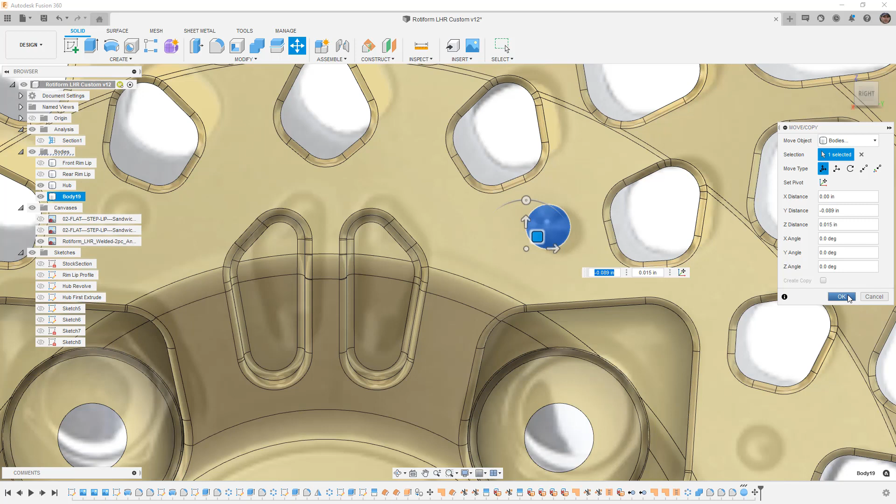So what I want to do is use move copy again. I'm going to select that body, and I'm just going to put it about where I think it needs to be. Now remember, I'm just doing this for visual reference. In reality, what we should do is project some references for where that thing needs to be, and then it'll be in the exact right location. This is really just for this specific reference.

Now let's go ahead and use combine. Again, we're cutting. Target body is our rim or our hub. The tool body is that little sphere. We're going to say okay.

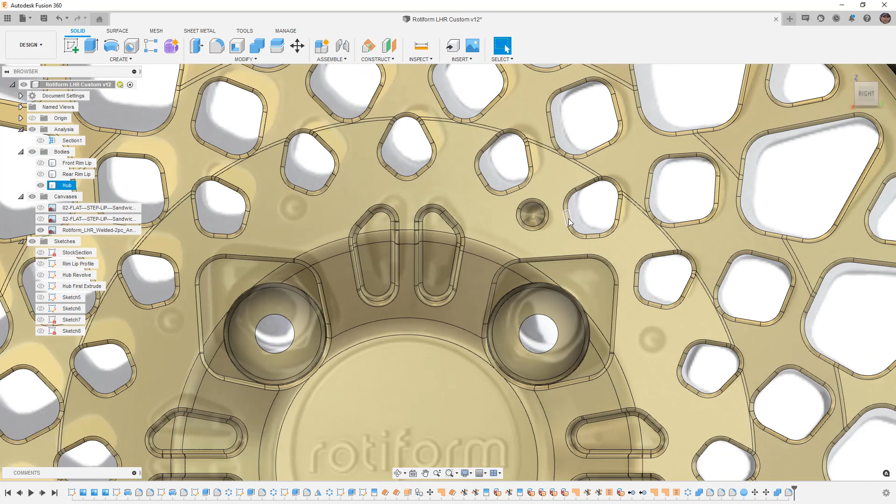Next, I'm going to add a small fillet to the edge. Let's say 0.05 again, that's what we've been using for everything. And now we want to create a circular pattern of that.

So circular pattern. This time, if we're doing features, it's not going to work because we had a solid body that we moved into place. So we're going to use the face option. We're going to select that dimple. We're going to select that.

Then for the axis, we need to select, again, a solid reference. We're going to grab the end of the rim. And then I need to increase the number of instances. Now, you'll notice that this has 1, 2, 3, 4, 5, 6, 7, 8 on there. So when we get to 8, they should be in about the right location, but you'll note that they're not.

So this one needs to kind of be up. If I increase this to 10, which is half of that 20, then the references look right. So based on the numbers that we have, we kind of need to just figure out visually what looks right. Now 10 doesn't look right because we sort of have this thing going on. So what I want to do is actually increase this to 20.

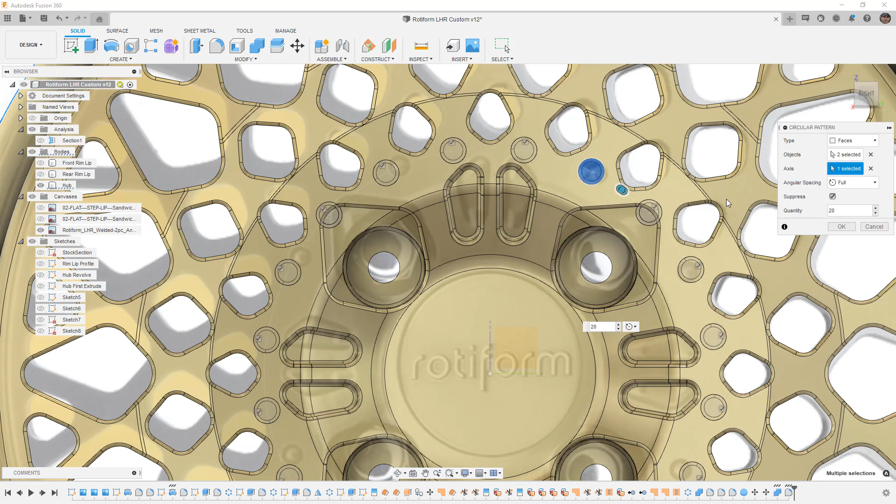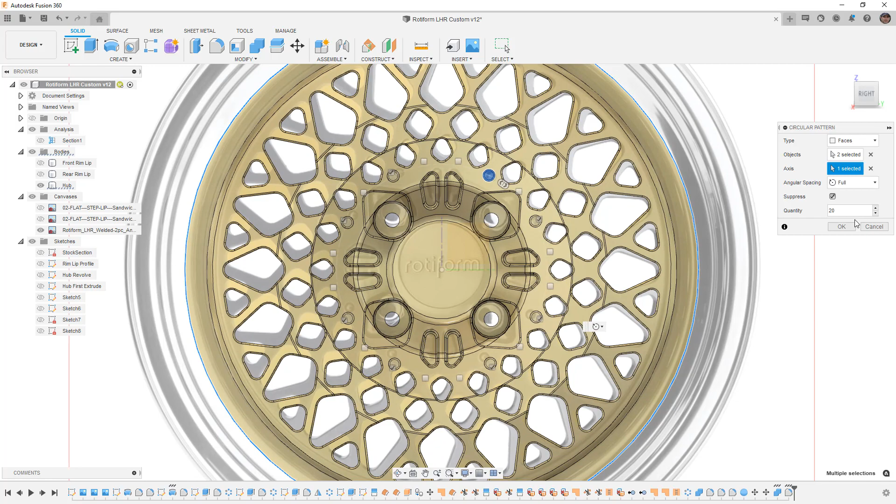And then I want to use the suppress option. The suppress option is going to allow me to pick ones that I don't want. And I don't want any that are near this. I don't want that. I don't want these two. I don't want the ones that are near the actual lug position. And I don't want that. So sometimes you might find that you need to use more instances and then suppress some of them to get the right look.

All right, so we're pretty far in at this point. I think this is a great time for us to save, make sure that we don't lose any work. I'm going to bring everything back. I'm going to use Control-4 so that I take away those edges. Everything is looking great, I'm really happy with the results so far.

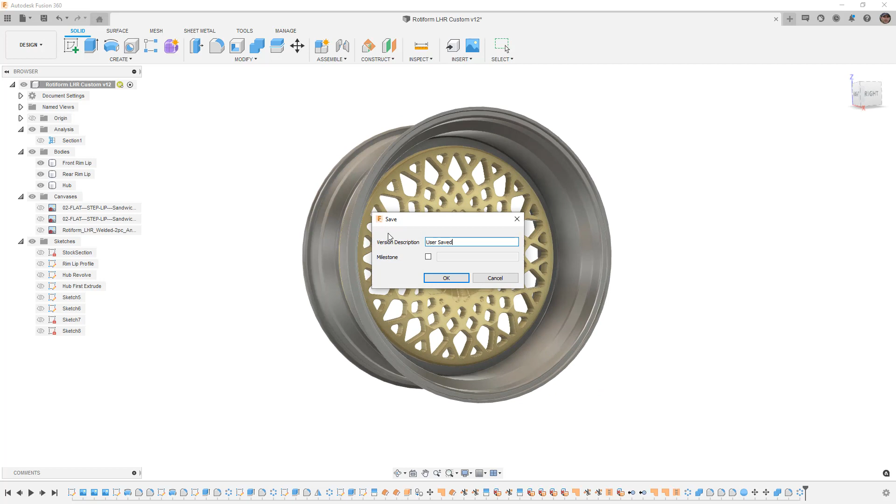And there's just a few more things that we need to do. But let's make sure that we save this. Don't want to lose any work. And of course, ask any questions and let me know if you have any trouble. But thanks for watching, and we'll see you in the next one.